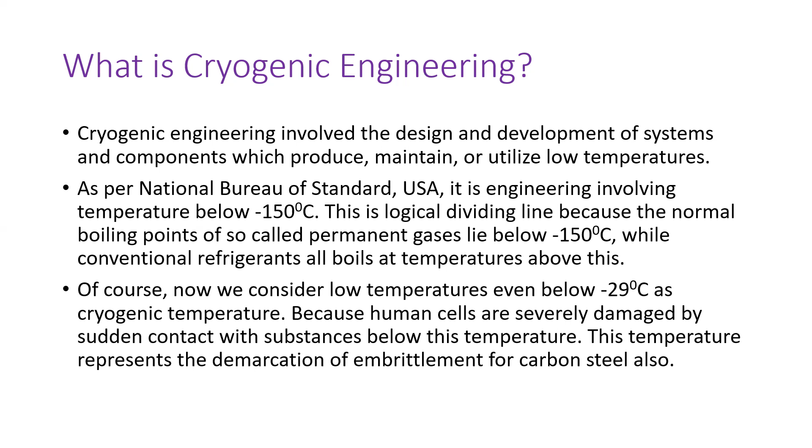So there are a lot of property changes of materials. That's why I think including this temperature under the cryogenic regime is very important, because of a lot of important applications coming out right now.

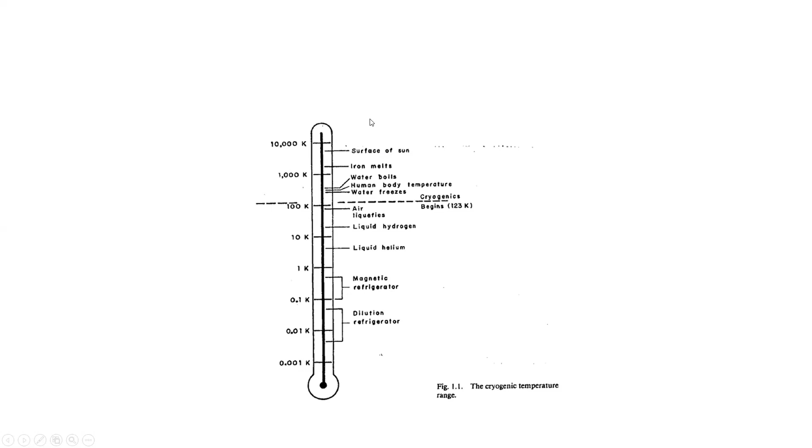So now I'm going to give you some flavor of the magical phenomena of cryogenics. Those are beyond our imagination. We cannot imagine some of the properties. While we are not able to imagine them, cryogenic engineering or cryogenic science phenomena have given us hope for some paths to break the barrier of conventional restrictions and so on. Superconductivity is one such phenomenon.

Actually, if we flow current through a conductor, it will face some resistance, what we call the resistance of that conductor, and due to the resistance, heat is generated. But some conductor composite materials at cryogenic temperature lose their resistivity. That means if we pass electricity through it, it won't face any resistance at all. That means current flow will be enormous, infinite. So superconductivity, which we couldn't imagine earlier, we have now seen in cryogenics.

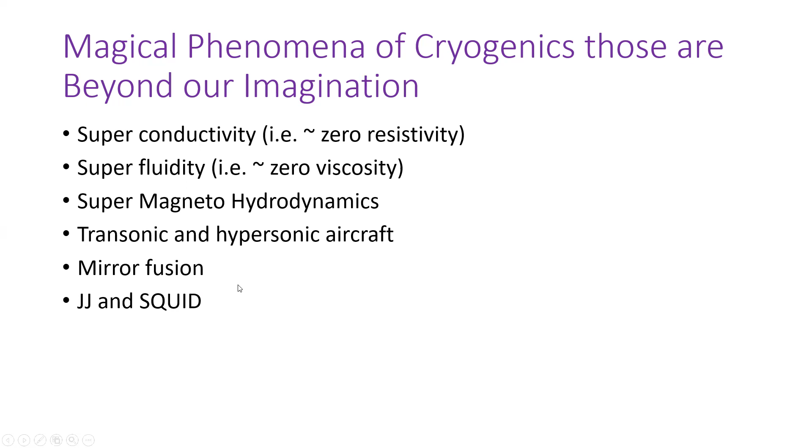Josephson junctions and SQUIDs. These have even replaced chemical cells as standards. So we are able to use the Josephson junction diode as a replacement for the standard cell for measuring voltage, and utilizing the interference between electrical and magnetic fields in SQUID, that is superconducting quantum interference devices, we have developed a lot of things. Most new instrumentation, computation, and electronics are based on this.

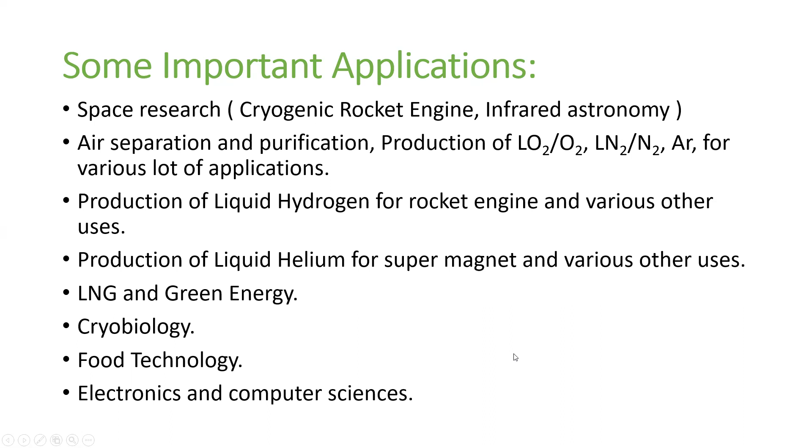Then electronics and computer sciences, as I already mentioned, for utilizing Josephson junctions and other microelectronic circuits. A lot of developmental work is going on. So these are some of the flavors that I want to give. So as chemical engineers, you have scope in this particular area: air separation and purification, production of liquid hydrogen, production of liquid helium, LNG. Of course, these are the common areas. So there also you can contribute.

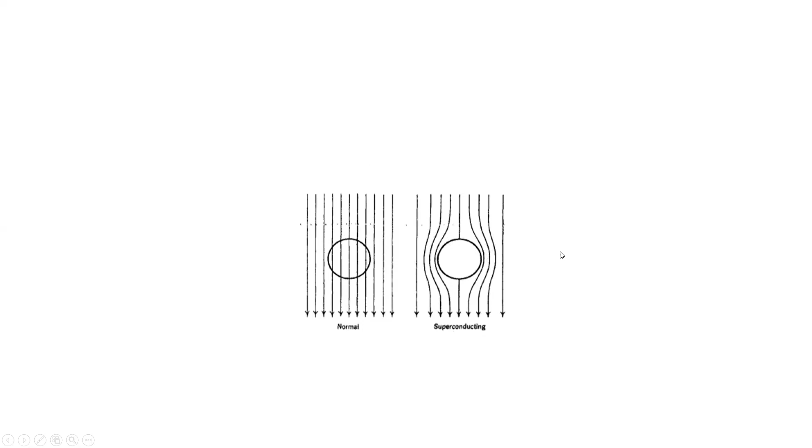One more important phenomenon that I want to mention is the two forms of hydrogen. One is orthohydrogen and another one is parahydrogen. In orthohydrogen the nuclear spin is in the same direction. In parahydrogen, it is in the opposite direction. So the para form is the stable form of hydrogen when liquefied, and the ortho form is the unstable form, but this is in the normal state. So when hydrogen is in gaseous form, most of the hydrogen is in ortho form, 75% or even more than that.

But if we liquefy hydrogen, why am I mentioning this particular phenomenon? Because initially hydrogen was liquefied and kept in an insulated container, and after some time we observed that nothing was there. All the liquid hydrogen evaporated. After investigation, it was revealed that this happened due to the conversion of orthohydrogen to parahydrogen, which is an exothermic process. A lot of heat is generated, sufficient to evaporate the liquid hydrogen. So nowadays, before liquefaction, orthohydrogen is converted to parahydrogen catalytically so that it will remain in liquid form for longer times.

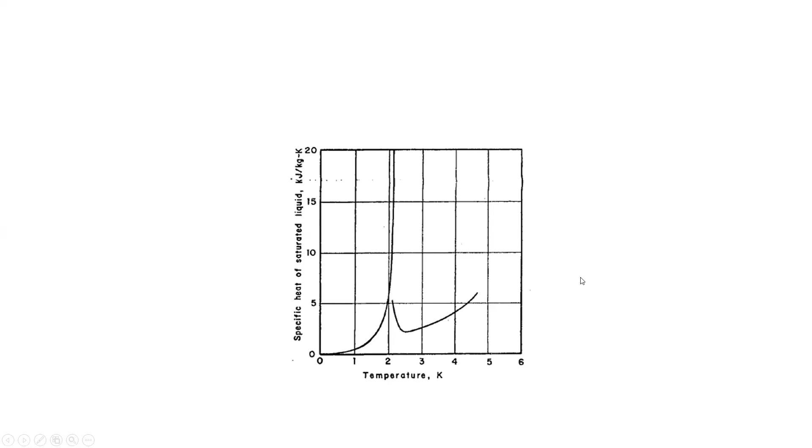This is because at this point normal helium becomes superfluid helium. It also becomes a superconductor for heat. So at this temperature it was boiling, and suddenly it becomes very calm, and we only see surface evaporation. This is a very peculiar phenomenon that we observe in liquid helium. Very interesting facts.

Now, how can we produce cold? By this means we will be able to achieve liquefaction, because unless we produce cold, we won't be able to convert gas to liquid. There are two important thermodynamic phenomena by which we can produce cold. One is the Joule-Thomson effect, and another one is the expansion engine. One is isenthalpic expansion, and another is isentropic expansion. By these two processes, we can produce cold.

The Joule-Thomson effect is observed for most real gases. When real gases suddenly flow through small apertures from high pressure to low pressure, the temperature suddenly falls, due to internal work done by the gas, and this happens when we do this below the inversion temperature.

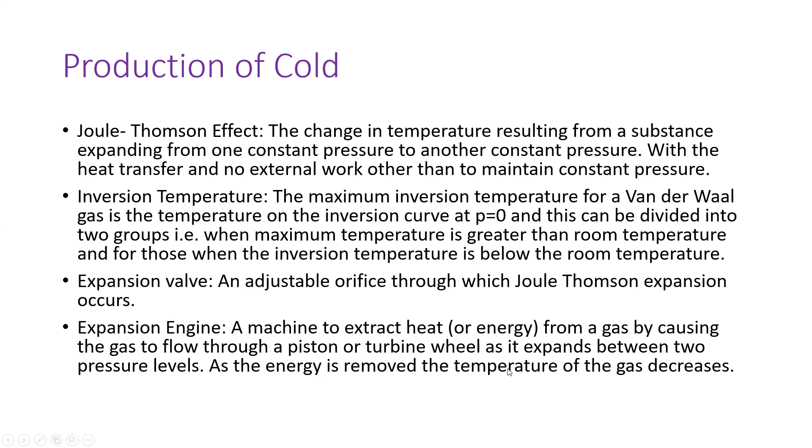Expansion engines: a machine to extract heat or energy from a gas by causing the gas to flow through a piston or turbine wheel as it expands between two pressure levels. As the energy is removed, the temperature of the gas decreases. So by these two processes, we can attain cold.

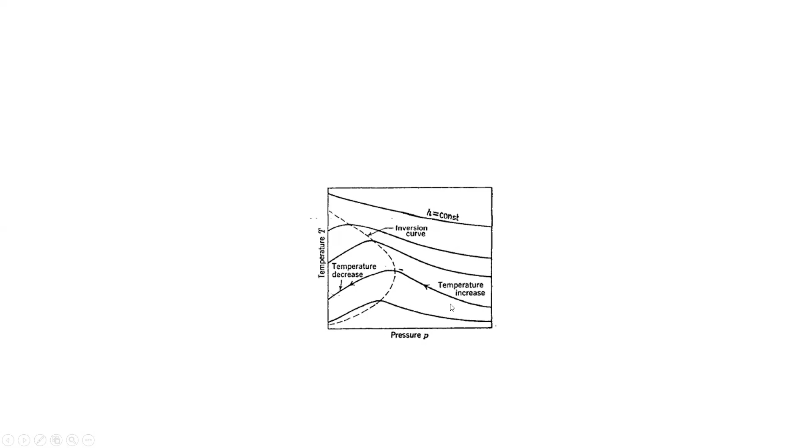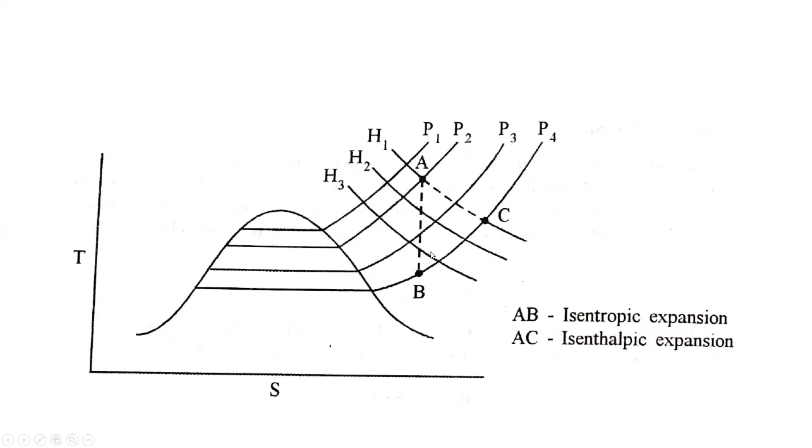So always we'd prefer the expansion engine, but there is some disadvantage of using expansion engines also. That's why the expansion valve or JT valve is so popular, because an expansion engine cannot work with a two-phase system, whereas an expansion valve or JT valve can handle a two-phase system. That is the main disadvantage of expansion engines.

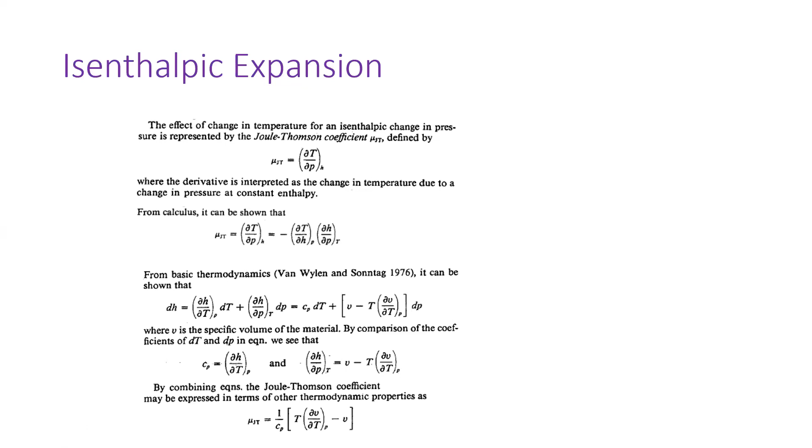So you can see that for isenthalpic expansion of ideal gases, its value is 0. So only for real gases we get this effect, and due to that we are getting cold. So for ideal gases, the Joule-Thomson coefficient has the value 0. So for ideal gases, there won't be any change in temperature if we do the expansion using a JT valve.

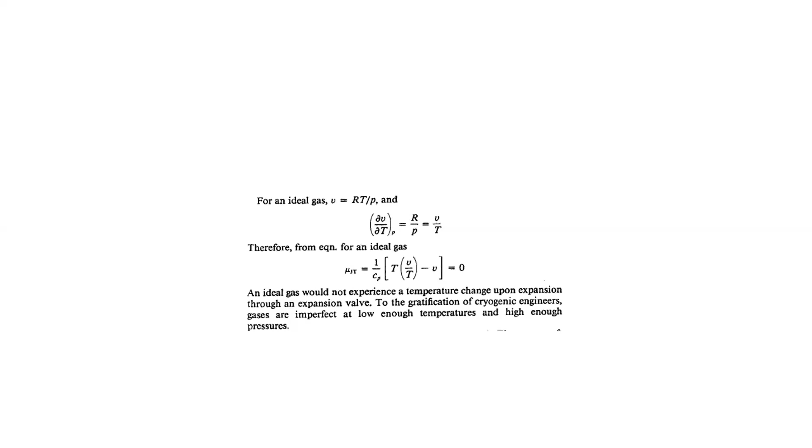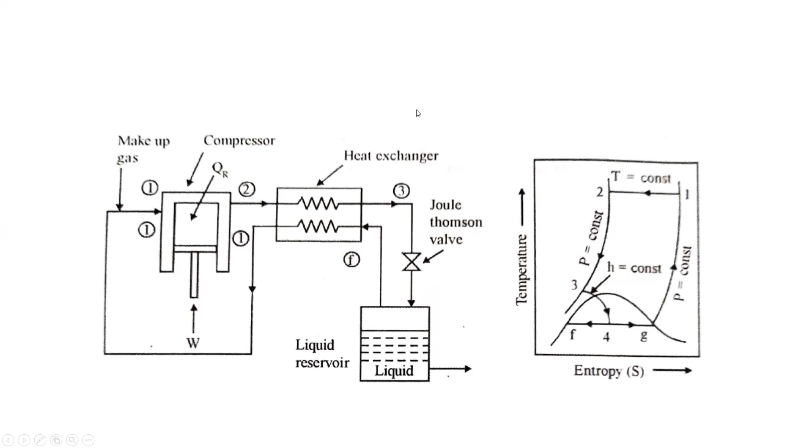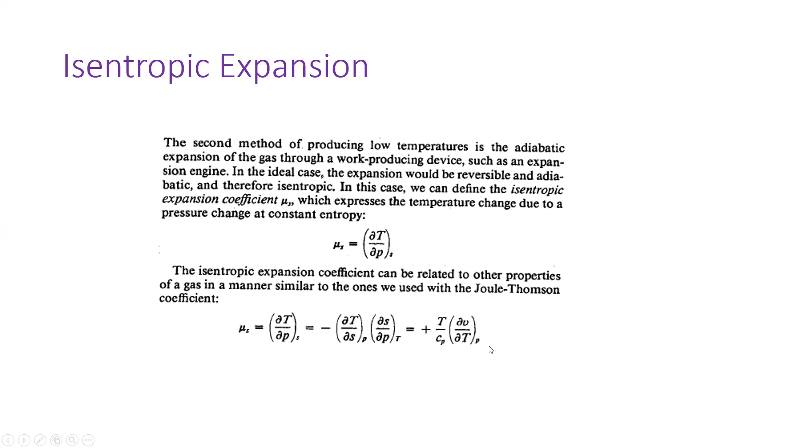And another phenomenon that I mentioned is isentropic expansion, where entropy will remain constant, and you can see that the coefficient is always positive. So we'll always be getting a cooling effect by using isentropic expansion. Whether it is real gas or ideal gas, for all the cases we'll be getting a cooling effect, and for ideal gas, its value is v by Cp.

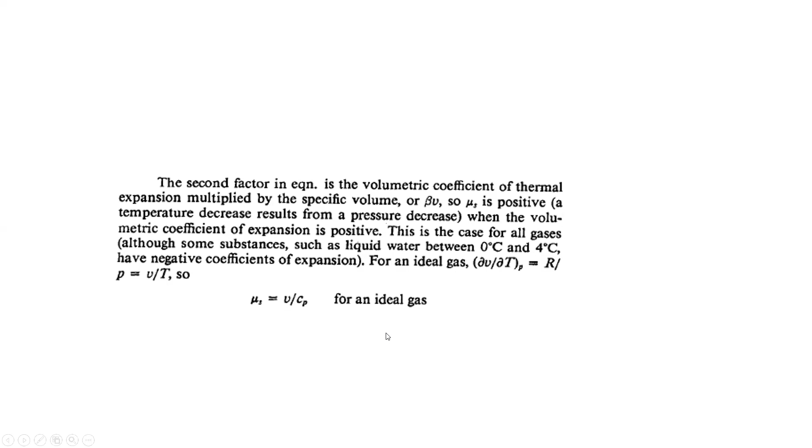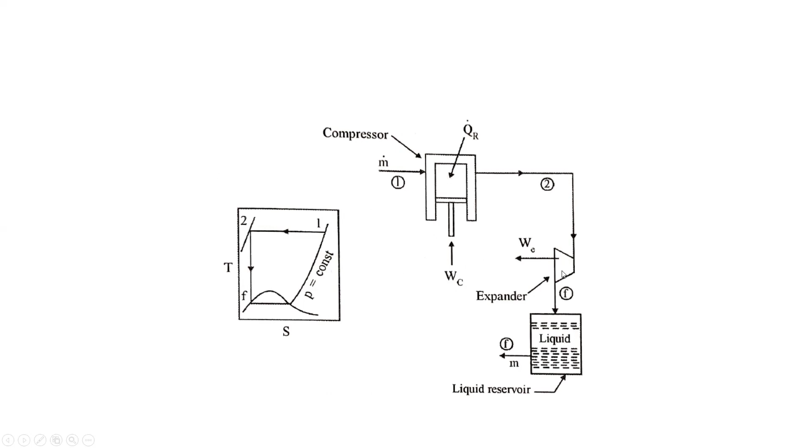It is always positive, and you can see that with the help of this isentropic expansion, we are getting the cooling effect directly. It is converted to liquid. So by doing isentropic expansion, we are able to convert gas to liquid. So these are the two processes by which we can get a cooling effect and are able to liquefy.

So up to this, let us stay with this, and in the next classes we will be further discussing in detail other industrial liquefaction processes, where air will be liquefied by applying various cycles. Those will be discussed later on.